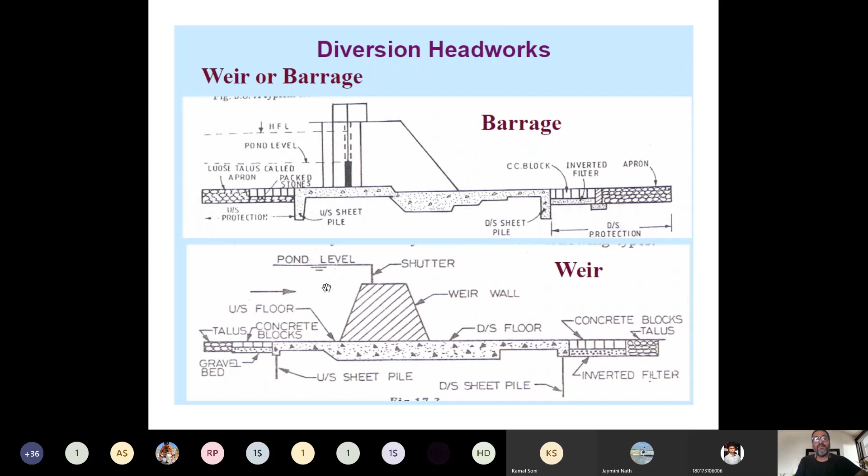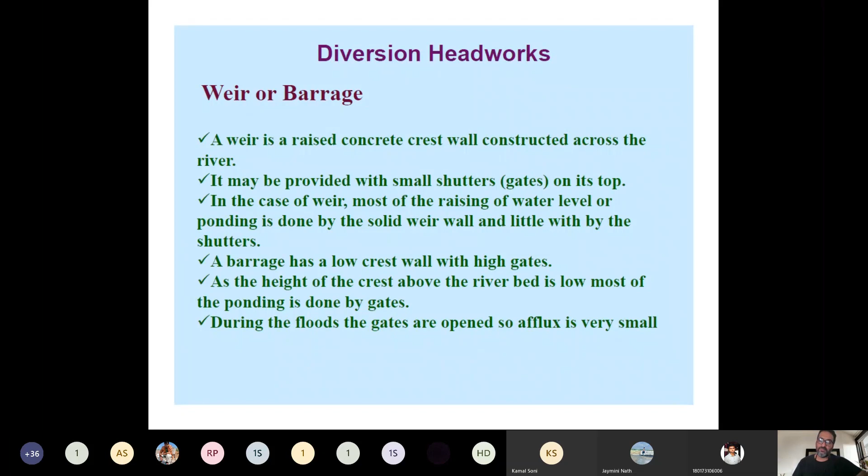I'll skip this slide, I have already explained to you.

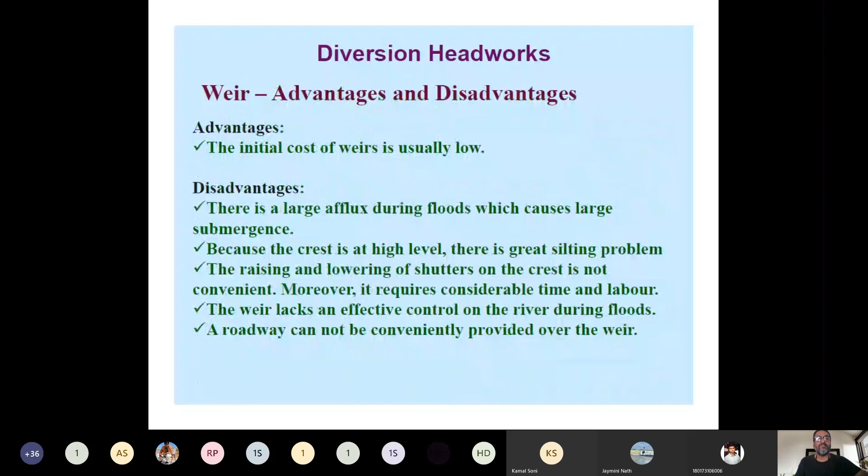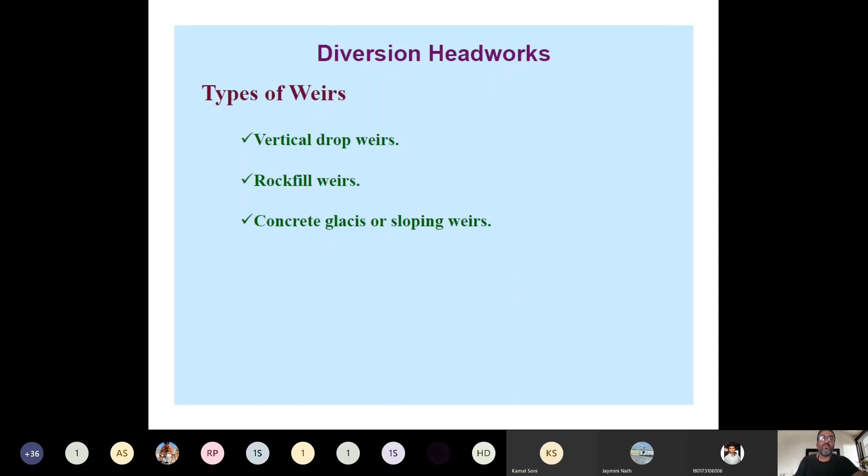Now coming to the weir and different types of weir, I'm not going to take them in detail since we have already discussed this: vertical drop weir, rock fill, and so on. This one I have shown you is the vertical drop type of structure. As written here in the last bullet, vertical drop weirs were quite common in early diversion headworks, but these are now becoming more or less obsolete. So they are mostly not being used, but the basic fundamental theory remains the same, as conducted by the technocrats on these structures.

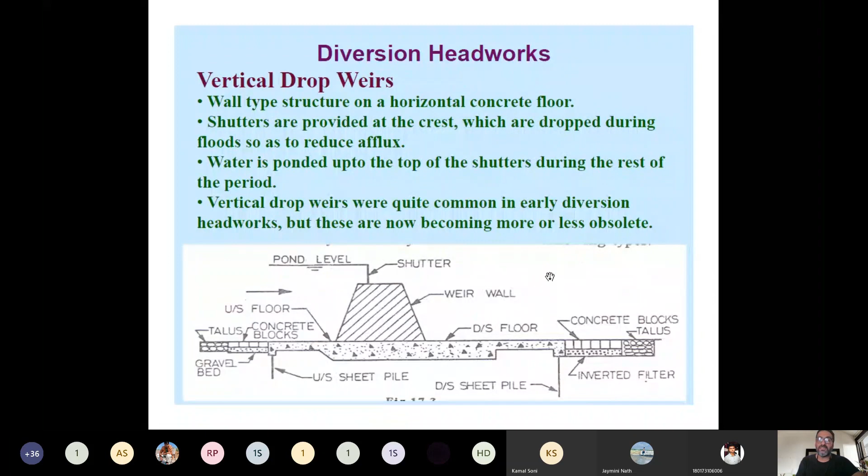The second type of structure provides a shutter here, and this is a weir wall, then core material is dumped, and rock is filled in between. One of the Okhla weirs in Yamuna at Delhi, you will find this kind of structure. They take a large amount of space and material to be dumped, and it's not used again.

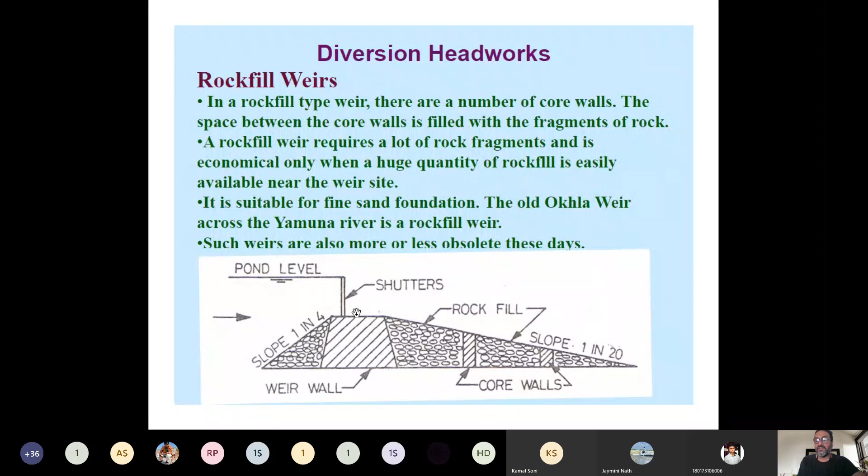So mostly nowadays sloping or glacis type of weirs are provided, but whatever you study, the design remains almost similar to all. So what is a glacis or sloping weir?

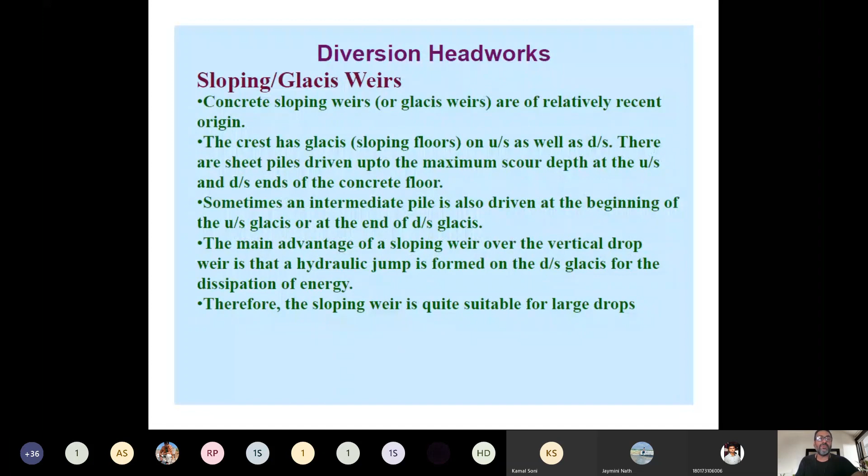This is a kind of concrete weir, I'll show you the sketch. I showed you one sketch last time also, and the design is almost the same. Here the compacted formation is done, and we lay the concrete floor like this.

The main advantage of this glacis type of weir is that when there is excess flow in case of flooding or monsoon, that excess water goes downside, and there is a good depth of water above it. That whole excess water falls onto this slope, and there is formation of a hydraulic jump. This formation of hydraulic jump is considered favorable in the design, because it facilitates the dissipation of energy.

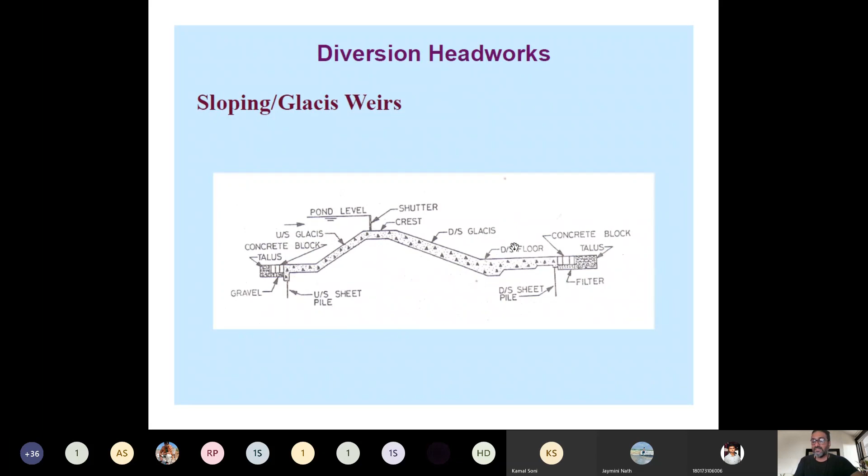To protect that, we need to dissipate and destroy the extra energy of the water, and water should come to the normal flow with normal depth. The depth of flow should not be more than the critical depth of water, and if the flow is more than critical, it will erode the bed of the river, as we have seen in open channel flow. So this kind of glacis type weir facilitates formation of a hydraulic jump on the downstream side of the glacis floor, and it facilitates dissipation of energy.

Now coming to the main thing which we were discussing. These failures would lead to three theories of design. You could basically read what has been written onto the screen.

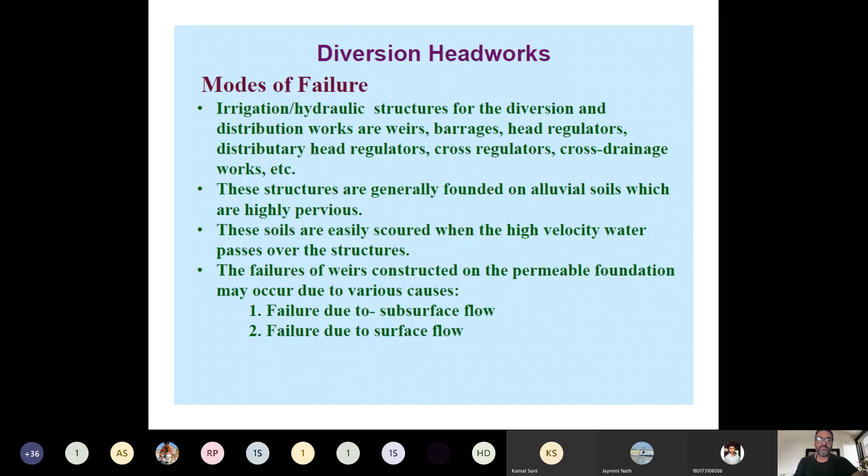So two types of failure are defined: subsurface and surface flow failures. For subsurface failure, there are two types. One is piping because of the exit gradient. Exit gradient, as I defined last time, is the total head divided by the total length of the floor, which gives you the gradient that exists throughout the length of the floor. The remaining gradient at the exit, where the floor ends, if it is more than the critical gradient, then piping occurs.

What does critical gradient mean? The critical gradient is the gradient above which, if there is any head or energy available, it will bubble the soil, boil the soil, and soil particles will start moving in the seeping water and come out, and piping action will start from the downstream side. I will show you this in the figure in the next few slides.

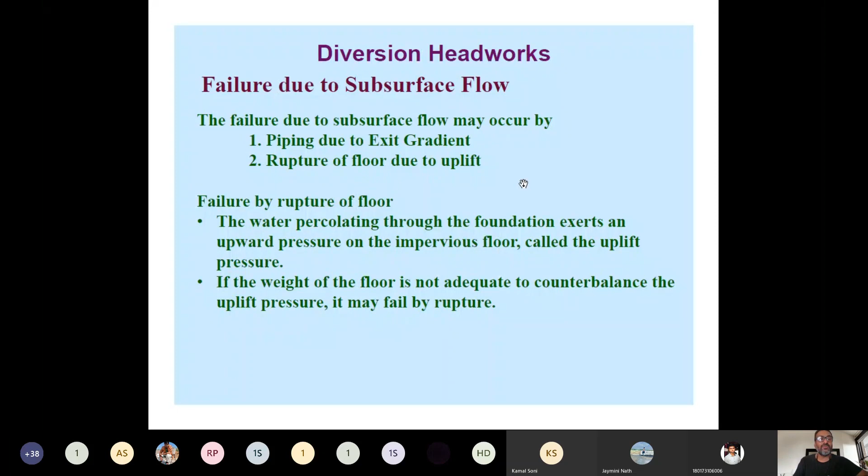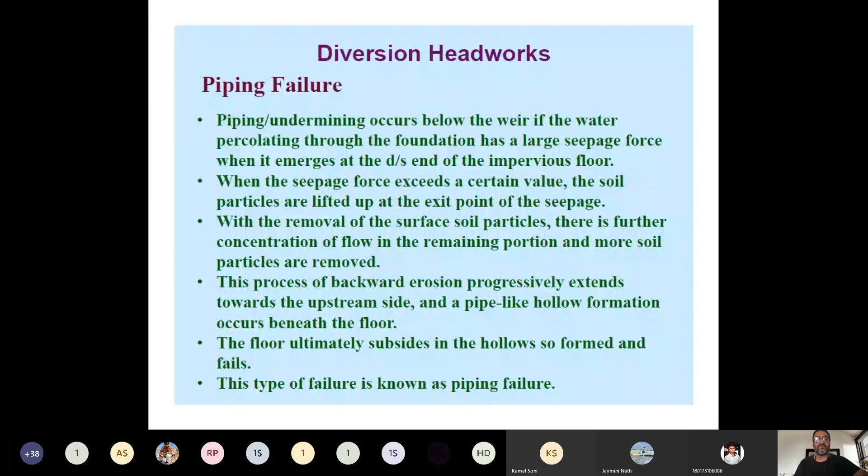And the second is rupture or breakage of the floor because of the uplift. So that I have explained to you. I'll show you something - this is a very good point mentioned which we have discussed. You could have a look onto these points. I explain onto the sketch drawn.

These are the failures due to surface flow. One is by the suction of the hydraulic jump which is formed, and the second is because of scouring. Scouring I have explained to you in terms of concrete blocks and in terms of the talus or boulders which we lay down to protect the bed because of the high velocities of flooding water in the monsoon season. So that is scouring, and the suction I will read out.

In the glacis type weir, a hydraulic jump is formed on the downstream glacis. In this case, the water surface profile in the hydraulic jump trough is much lower than the subsoil hydraulic gradient line, HGL. The total energy line, TEL, you have seen in open channel flow. Here we are studying hydraulic gradient line, that is H by L. So that hydraulic gradient line is higher in terms of the subsurface profile of the hydraulic jump. So in that case, there is a lot of pressure.

Therefore, uplift pressure occurs on the glacis. Glacis means the downstream floor. This uplift pressure is known as the suction pressure. In that case, uplift pressure gets converted into what we consider suction pressure, because the profile of the hydraulic jump is lower than HGL. So that creates a kind of suction on the glacis, and if the thickness of the floor is not adequate, then rupture, meaning cracks, will develop on the glacis, and that may lead to failure. So these are the two surface flow failures.

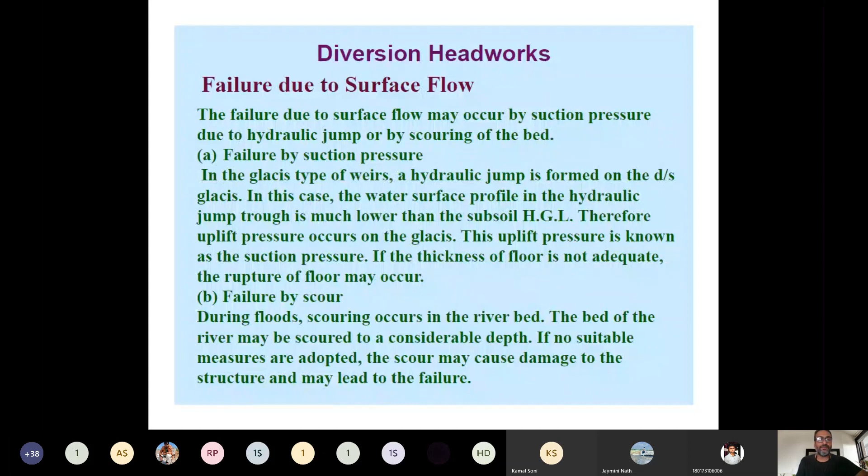Now, with the help of this failure concept, we assume surface failure and subsurface failure. So this has been studied by these technocrats, and they have given a kind of understanding of how we should design the floor. So design of floor was basically to find out the length of the floor - LT, meaning the total length of the floor - and also the thickness of the floor, what thickness should be provided to protect it from the uplift. So that is what the theory is about.

So this was given in 1910, and what he assumed - Bligh, B-L-I-G-H, Bligh - assumed that percolating water creeps along the contact surface of the base profile of the structure with the subsoil. What he assumed is, when water seeps here on the upstream side, this line gives you where H is the head created upstream of it, the total head created.

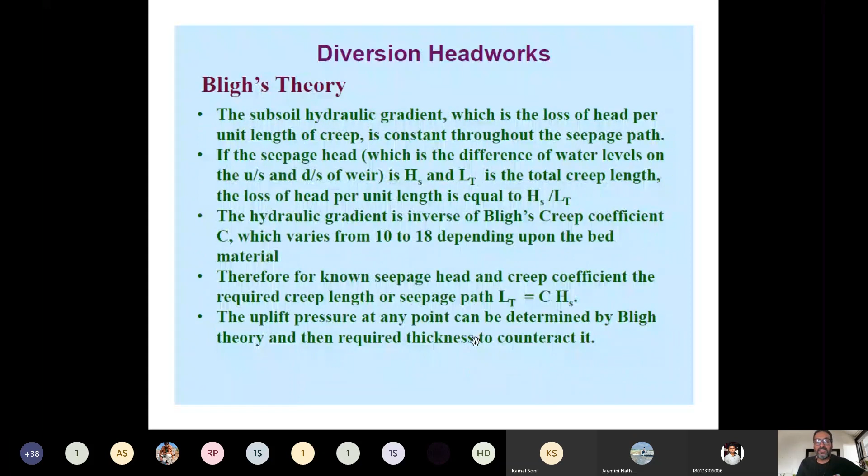But if it's not 0, we have to check whether it's within the critical range or not. At all other points it is reducing, so there's no need to provide uniform thickness throughout. Even with this theory, there's a lot of uplift at the upstream front and lesser uplift toward the end, so if we don't provide uniform thickness throughout, it's okay. But he assumed a constant thickness throughout, which was also a kind of limitation of that theory.

You can read this out, many of these things we have already gone through. I'll cover only two topics today -- I'll take two more slides beyond this.

Khosla's theory I'll take up in the next lecture. After Bligh, there is Lane's theory, and to arrive at Lane's theory, we have to look at the limitations of Bligh's theory.

Bligh assumed the creep length is this, water flows adhering to this, and that the upstream front and rear portion of the pile are equally effective in counteracting the energy of the seeping water -- but this was not true. He also assumed each and every pile, whether upstream, downstream, or intermediate, are equally effective, and that the upstream and rear sides of the pile are also effective. But there were troubles after Bligh's theory.

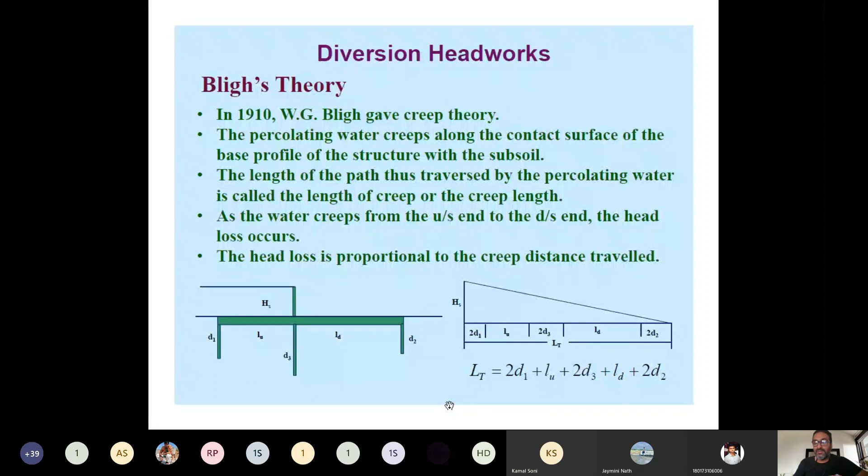So this effectiveness was studied by Lane, who showed that all the piles are not equally effective. That was the important thing demonstrated by Lane. So I'll take you to that slide to look at the limitations.

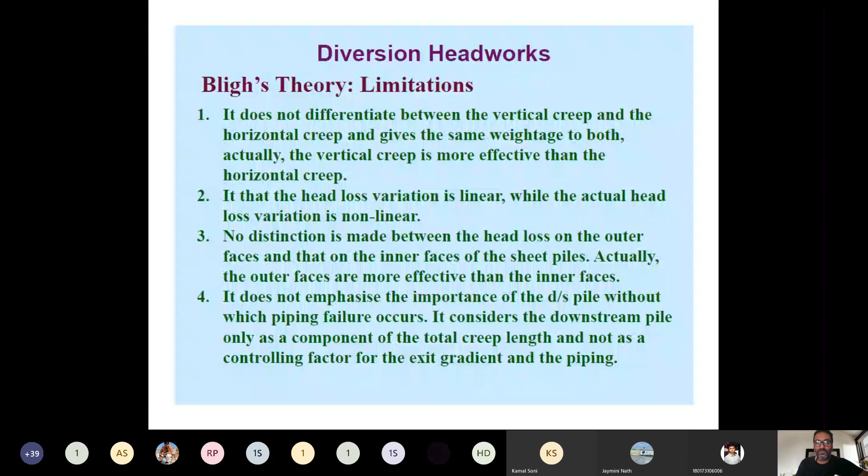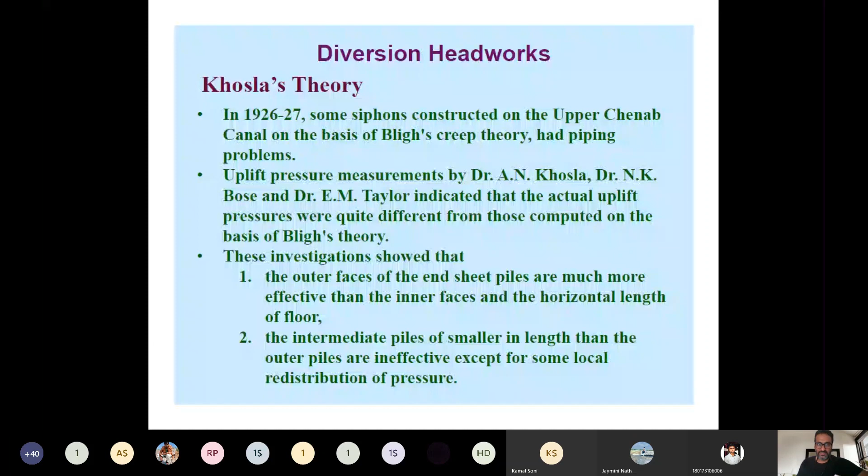We'll understand the nitty-gritty of Khosla's theory in the next lecture, to overcome the failure of Bligh's theory to sustain or retain the structure for a longer duration under flowing flow.